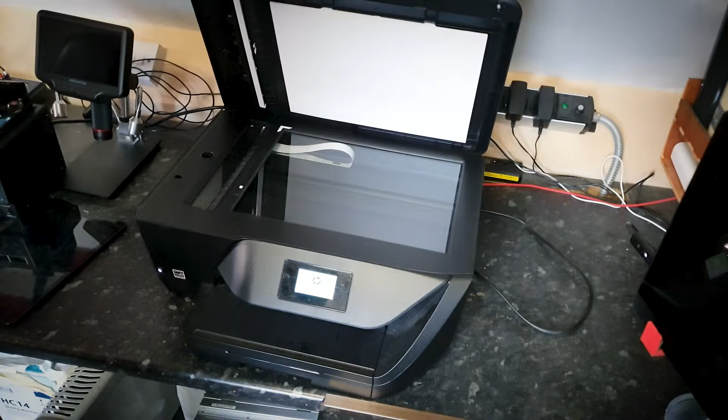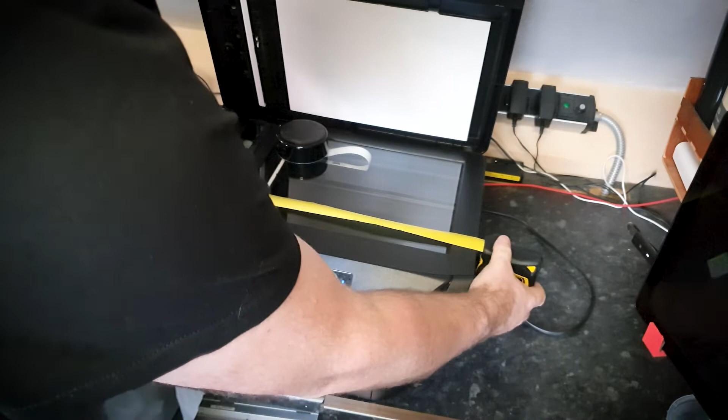Once the printer is set up, place the Alexa onto the flatbed scanner in a position where it can be seen and it's not obstructed. Next, take the tape and place that face down, also in an area that can be clearly seen. Place something heavy on top of the tape to stop it from moving around during the scanning process.

Using a scanning utility, scan the objects on the bed of the printer. Here I'm using the default scanning utility from the Windows Store. Next, review the scan. If any objects are not clearly visible or the tape is not clearly readable, reorganize the items on the scanner and scan again.

Now we have a scan that we're happy with, we need to save it onto the computer so we can access it via the CAD application.

But why is this process any better than taking a photograph? With a camera, all the light is focused onto a single point, meaning that you get obvious perspective. Whereas a flatbed scanner captures the image in a series of parallel lines. This means there is no perspective in the captured image. This is perfect for when you want to start modeling on top of the image and you don't have to compensate for any optical distortion.

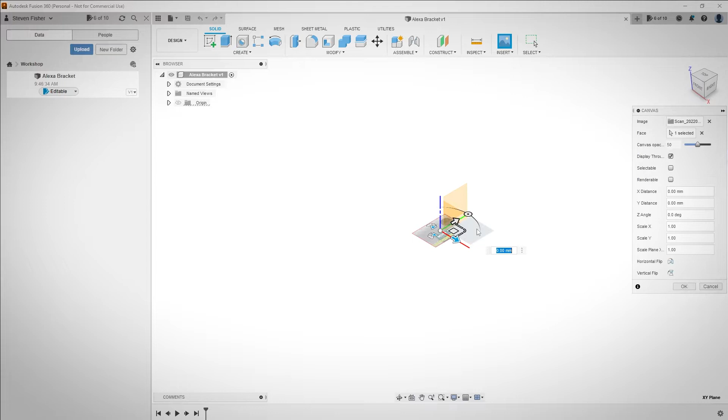Now that's out of the way, let's bring the image into Fusion, where we can use it to start modeling our bracket. Once inside Fusion, we need to set up our project. And to do this, we insert a canvas. The canvas is going to be the scan that we did previously. When inserting the canvas, select a file from the computer and browse to where you saved the file.

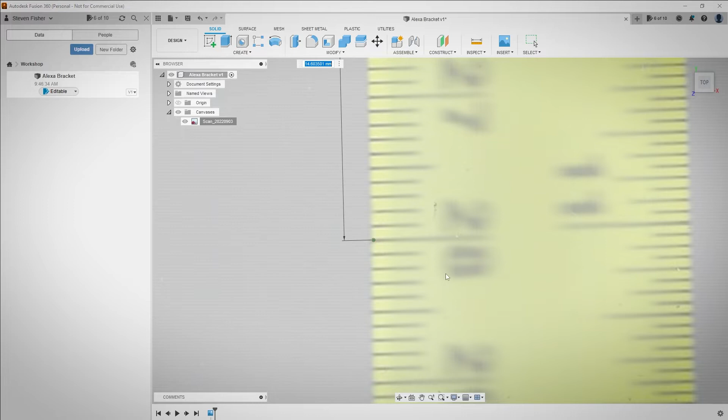Once loaded, we now need to calibrate the image. To do this, right-click the canvas from the tree view and select Calibrate. Now, using the tape that we put on the scanner, select 2 points which are a reasonable distance apart. Remember, the further apart you choose the points, the more accurate the calibration will be. Next, type in the value of the distance between the 2 points. Once you click OK, your image should now be calibrated.

All that's left to do before we start modeling is to rotate it and place it in a position that is convenient for us.

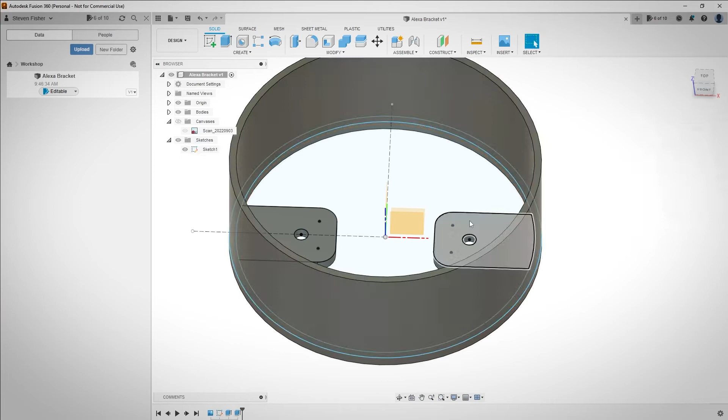We can now start to sketch on top of the canvas, knowing that we're calibrated with the object. Now, depending on how you set your canvas up, I can either draw a center circle in the center of the image because it's aligned with the origin, or I can use the 3-point circle to closely click around the object to find the center point. From there, I'm able to build up the bracket, ensuring I have a sufficient tolerance around the object itself.

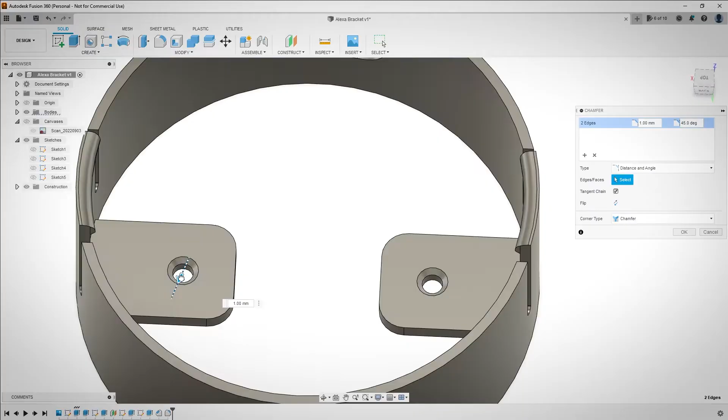Now all the modeling is done, it's time to send it off to one of the printers in the farm.

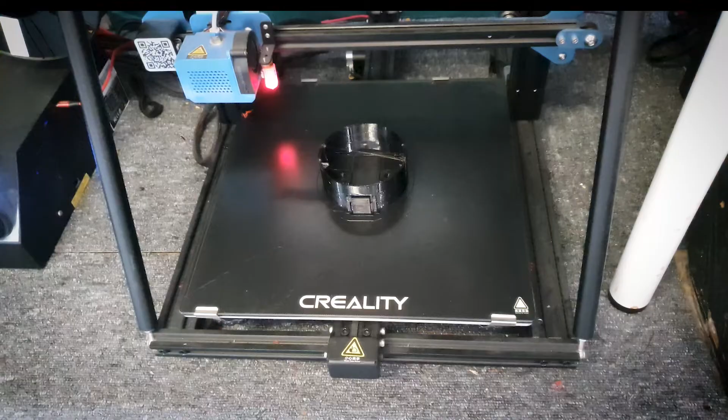Once the printing is complete, it's time for a little bit of cleanup and attaching to a French cleat system that I've got here in the workshop. The Alexa fits perfectly and can take pride of place on the back wall of the workshop.

Now, admittedly, this is a simple project to demonstrate the theory behind the technology, but you can use this to design some really complex objects.

This could be tracing a circuit board to build an enclosure, or another example that I've got where I repaired a refrigerator door where the retainer got snapped in half and taped back together. Using this method, I was able to print a replacement that fit like a glove.

This isn't only limited to using with 3D printing. You could also digitize a gasket set and then laser cut it out of gasket material. If you can fit it on the bed of the scanner, then the options are pretty much limitless.